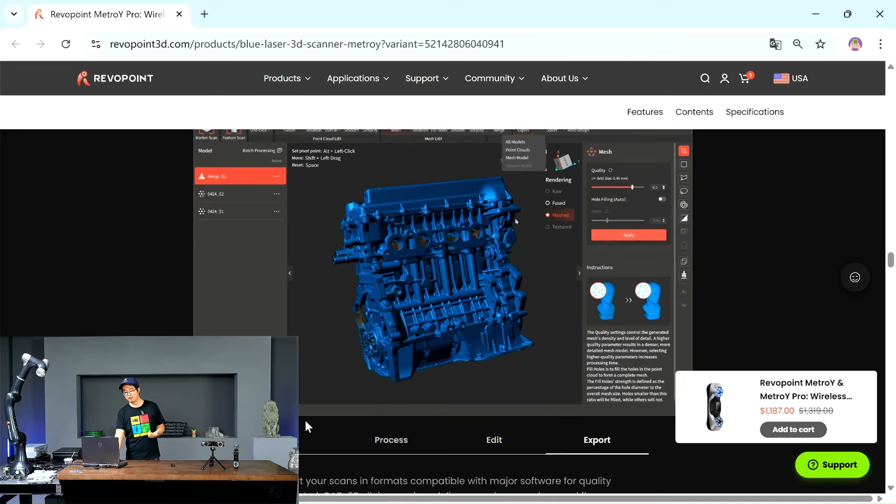Okay, now coming to Revo Metro, this scan software, which we are going to demonstrate a lot. It's just a free software that comes with your scanner that does the scan process, like editing and merging, filling the holes, these functions, and is eventually exported with PLY, OBJ, STL, and many other formats. And it's free. It also has Revo Design and Revo Measure software for your full workflow.

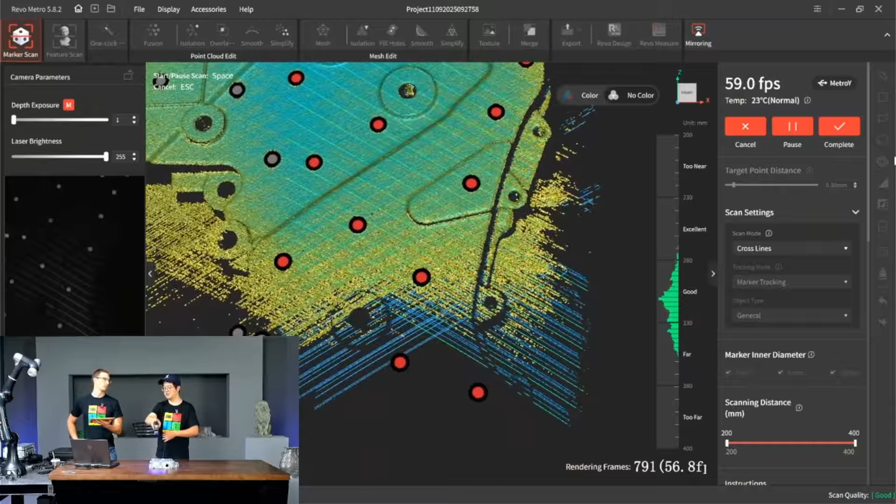As you can see, we actually updated the software. Now you see a new visual effect. It's not green anymore, now it's blue, nice on the eyes. We also increased the rendering technique, so right now what you're seeing is much less noise compared to the previous version.

We're not letting it dynamically show the scanning surface, so the FPS might be increased with a visual effect. I mean, the FPS should be the same, but visually you are seeing a more smooth scanning process.

0.30 millimeter distance, that's standard. Yeah, that's the default. So probably this is what you want when you first get the scanner.

And if you have an Inspire 2 scanner and you download the software, you will be surprised. We're going to make a separate video talking about that.

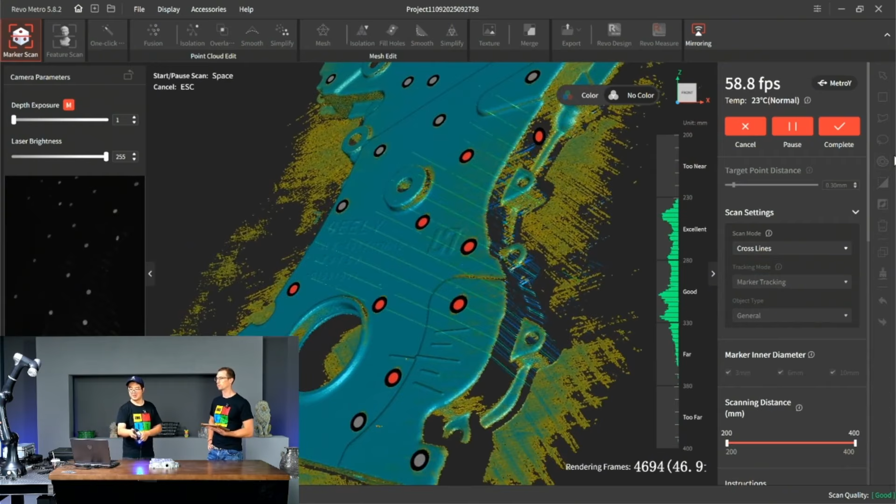If we compare it to the Metro X, I feel like before we definitely would have to kind of angle it around more. So you're now not feeling that as much, are you? Not even 45 degrees, you just tilt it a little bit to scan the side really well. So I think that's another good side of the bigger FOV.

You will feel that FOV especially when we're doing the Metro Y Pro. It has even four more lines.

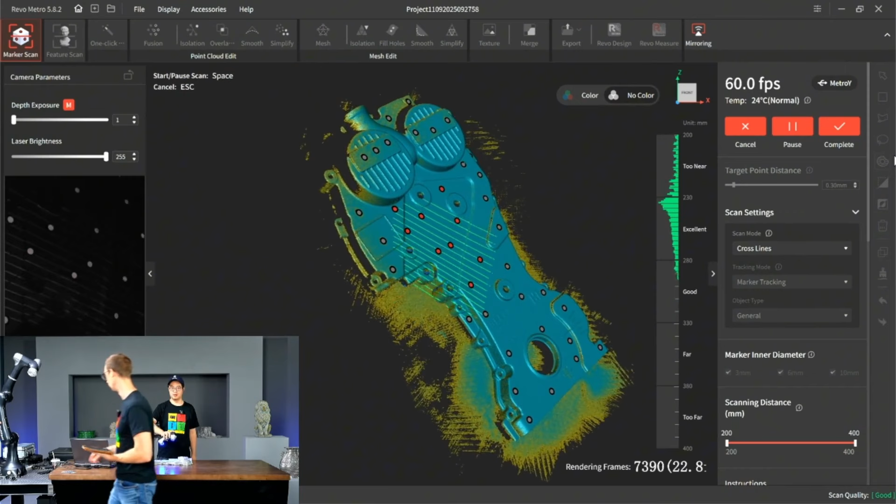You can pause and resume the scan anytime. And if all your markers are on a piece, you can freely move your piece around, even putting it on the turntable. But if for whatever reason you have some domes, some pyramids, marker blocks around, in that situation you would not move it, of course. You can put all of that on a large turntable. But if they're just on the table like this and it moved around, that would be distracting, then that's not good.

The M button, you use it like now. As you can see, we have scanned pretty much of it. Now press M, you can zoom in, and now you will notice what area you're doing right now.

Yeah, it definitely makes it a lot easier to see. And this side.

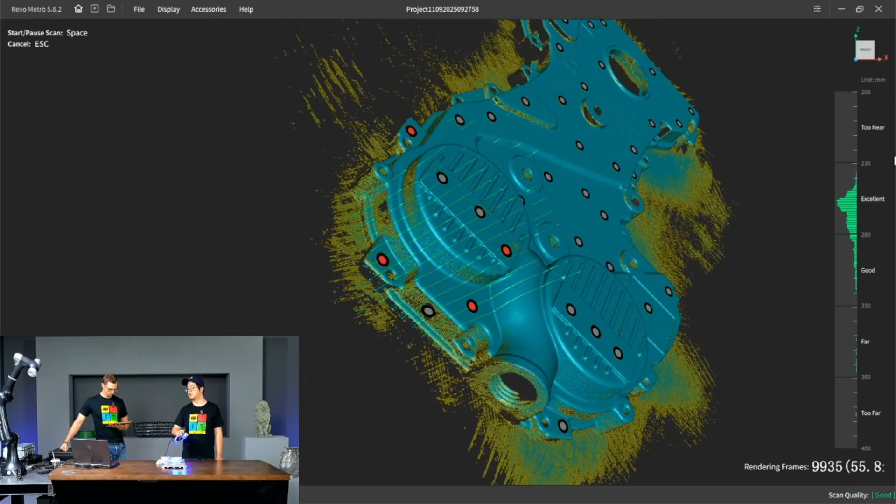The distance meter is not too sensitive. You could scan at a little bit further away distance, and it's not the end of the world if you are too close, you can just adjust in real time. The distance meter bar will tell you by the color. Your job is to maintain all the color in green, and you're good to go.

Okay, the other end, I think we're good to go. Capture this area.

Definitely fast though with extra cross lines. Yep, 30 extra cross lines.

So let's see it. Now with the new rendering technique, as you can see, it's already looking awesome compared to the older version, right? Like right now you can almost see what it should look like after it's meshed. This is the new rendering technique we adopted.

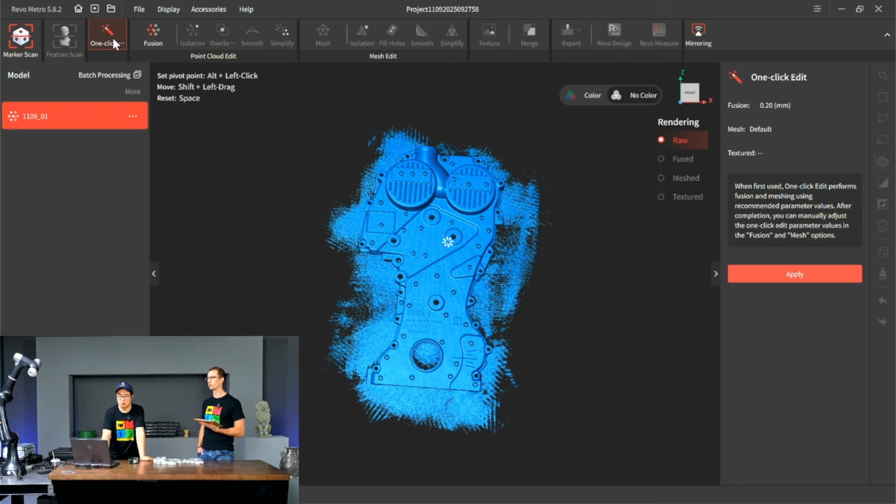Hit complete to finish the scan, and the software will automatically take you to the processing. If you're new to this software, we highly recommend you try this. One-click editing is quite a no-brainer, it will just do everything for you. But here, we're going to do it step-by-step.

Fusion is basically, as you can see, we're under the rendering, we're on the raw stage. All the points are kind of raw. So now what we do is fuse them, make the points more aligned.

It recommends a number for you, this is also interesting, right? It recommends a lower number if it feels you've done a really good scan, so it's pretty happy with how you've scanned it. So this 0.16 point distance means the smaller this number is, you will have a better result.

You'll have better detail, better nook and cranny of the piece you're scanning. If you have a larger point distance, your post-processing will be really fast, but you won't get a really nice detailed 3D model. The detail on it might be washed off. So it's pretty much determined by what you need.

Now we're showing you live, so we want to show you good detail, so we choose a rather smaller number. But when you're using the software and you just want to reverse engineer the frame, then you can just use a rather large point distance number for your project.

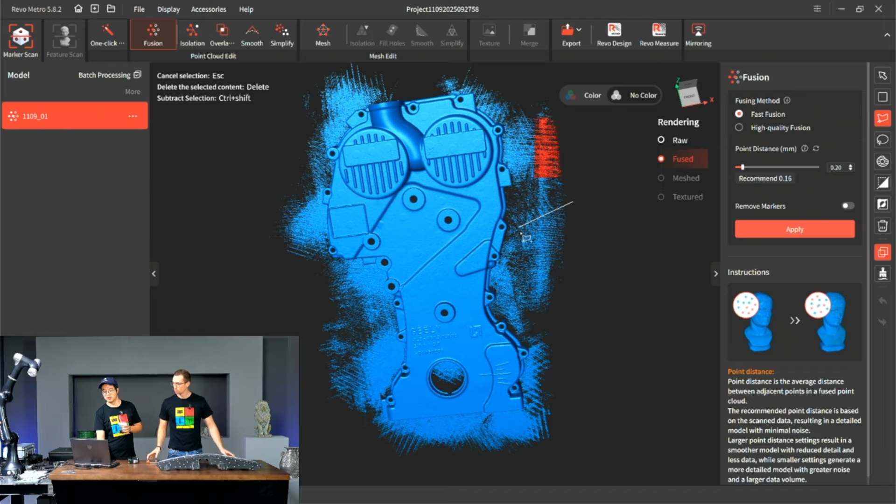So here, this is something more I would like to talk about: these are the selection tools we can do. Like this rectangular, you can select by drawing a polygon, but remember to connect the ending point with the starting point together. It lets you know, right? There's a circle that pops up when you connect it. Sometimes in the early stages I always had a hard time connecting it, but the circle will pop up to tell you.

And also select connection - this is my favorite. Specifically in this case, I just want to get rid of the surface of the table we captured, so we just use this function, slice. Gone, boom, right? And here, isolation is allowing you to check if those are specific noise or unnecessary parts that are not connected to the main object 3D model.

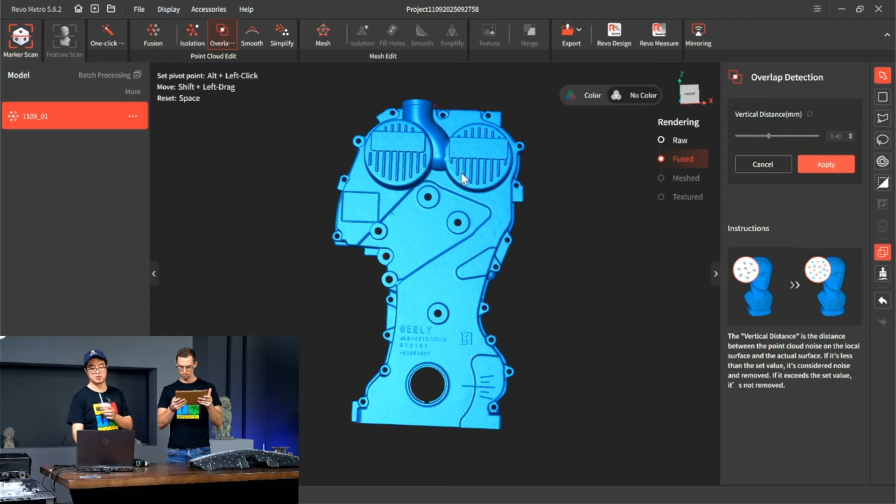And also overlap detection is to let you check, for example, some area you scanned too well while in some other areas your point cloud is too thin. So it'll check the overlap detection and let you delete those overlapping layers.

Smooth and simplify - we won't show you in this live because we want to keep all these good details. If you are good with that, then you can wash away some of the surface, and also simplify will shrink down the size of your 3D model format.

Did you mention you can simplify just by simplifying certain areas, like those markers? No, wash is not those - simplify is called smoothing brush, yes you can, but it's ultimately simplifying that area. So if you feel like you don't want one of these remaining markers, you can use the brush to brush it more flat.

And mesh - we're not going to waste your time showing you a high quality mesh. We'll just run a quick mesh and let you see the final result. It's already looking great under fast fusion and fast mesh.

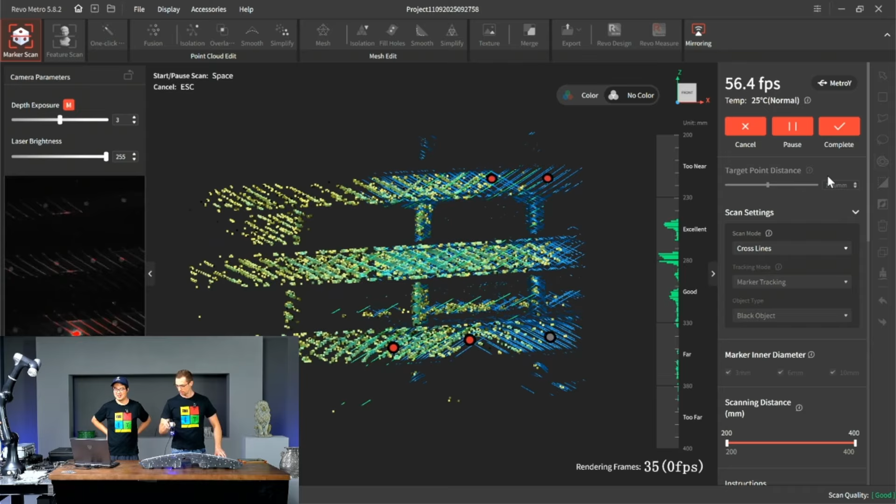Yeah, I think it's not right. It's acting up. Let's reboot the software.

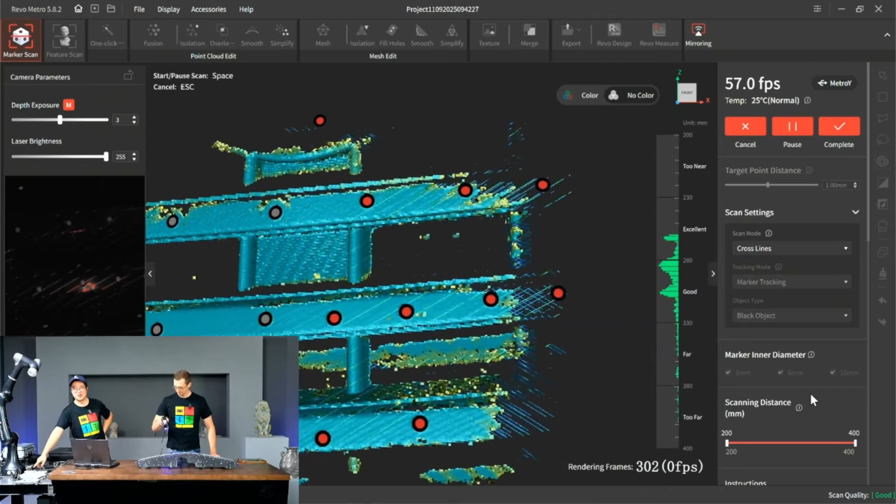Yes, key number one: don't scan a piece that is too dirty, especially if dust is covering your markers. That is definitely not good.

I'm sure you guys immediately notice the difference from switching. Previously the standard was 0.30, and now you're doing 1 millimeter. It just immediately turns blue on the home screen. Yes, you just fly through it, over double the distance, the points.

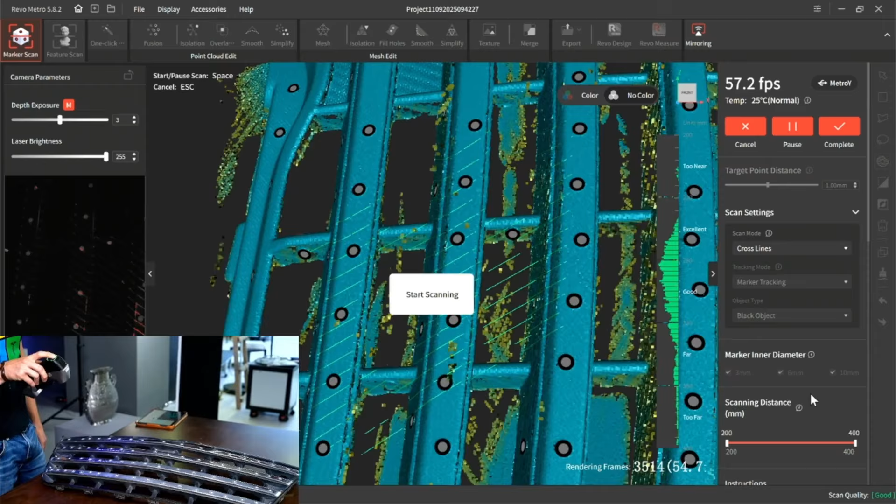Definitely twist it around a little bit again. Pause it, try to get those angles. So great with tracking, as I just twisted it, flipped it around, didn't have any issue with finding its position again.

Man, look at that. Aqua blue. Aqua blue? Are you sure? I mean, seems like an aqua blue. It's just hard for me to distinguish all these colors. Remember, I always call your blue shirt a gray shirt. Hey, what's the term for that? Colorblind? No, I'm not. I don't think I'm colorblind. Because you're seeing colors, but how your brain is reading the colors is a little different than mine.

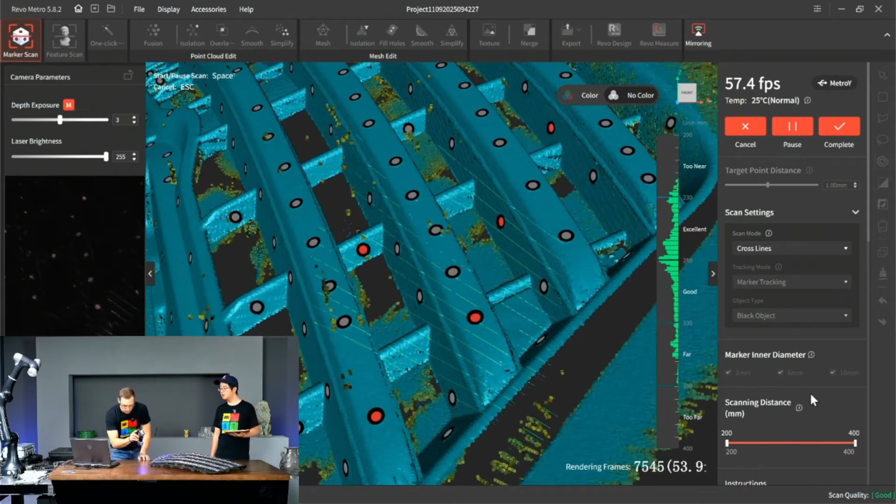Because we are going to be merging this with items like this, the grill on the side has some little knobs that shoot down. Make sure you try to properly capture those types of things if you can. Adjust your angle like this, just the angle, and capture it. Probably use the M button wisely.

Any plans for GPU acceleration with AMD GPUs? Unfortunately, 3D scanners, not only Revopoint 3D scanners but actually all 3D scanners, are based on NVIDIA CUDA cores. So unfortunately, this technology only runs with NVIDIA CUDA core GPUs.

Don't do that. The marker tracking becomes much more stable. Yes, yes, indeed. I'm really happy with that.

Trying to get these front ones a little better for you. Tell the devs to make the M button cycle laser scan modes. Yes, we could definitely utilize this M button more, rather than right now just using it for...

Let me handle it. You just have to be a little more patient.

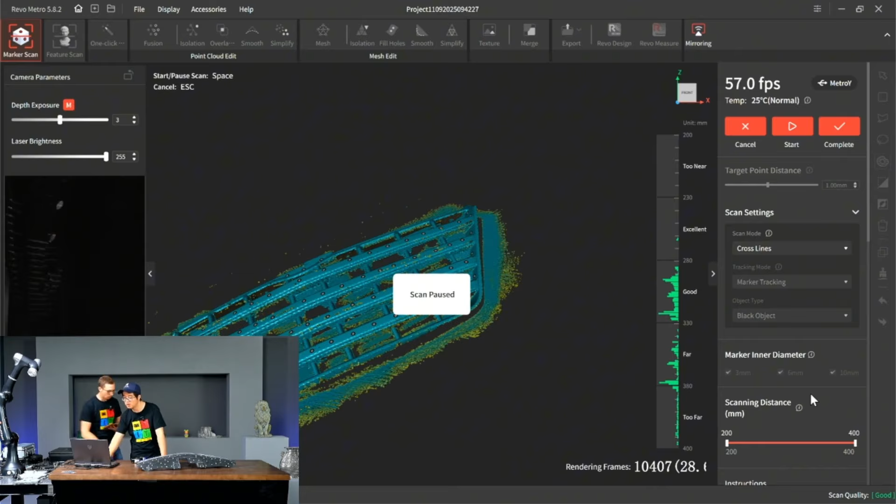Capture those, we could scan. We could capture them from this side. Sure, so don't worry about it for merging, because as long as you have these three. Okay, those three are showing up pretty good.

Yeah, okay. Oh, that one's missing, right? Just this one right here. Okay, so let's scan this side a little more. We should be good to go.

I'm not going to Germany. Are you going to Germany for the trade show, Ash? Nope, you mean Formnext? No, I'm not going there. Are you? I am not.

Okay, now I'm going to show you a feature of the software. Here is scan number 1. So now let's click new scan. Let's not bother to process the first scan yet.

You want something underneath there to keep it stable? Sure. Not really, you're not worried about it wobbling? Because I also want to move it around, so okay, I'm fine.

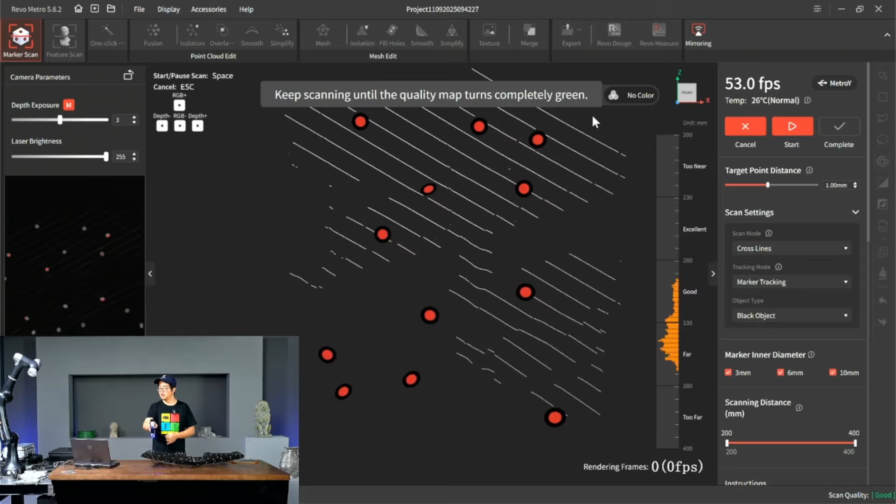Here we go. Oh man, look at that. Really like how it turns blue, it feels just soothing.

Any tips for scanning edges of thin sheet metal? I do, yeah, we've scanned. If you have a Trackit, that's definitely an option. But if you don't have a Trackit, if you have a marker block kit, you can utilize one of these marker bars, and you can lean that thin metal piece on the bar and let it rotate on the turntable. That's how you can capture the thin metal sheet. Especially, you can capture the thickness data of it, which is pretty handy.

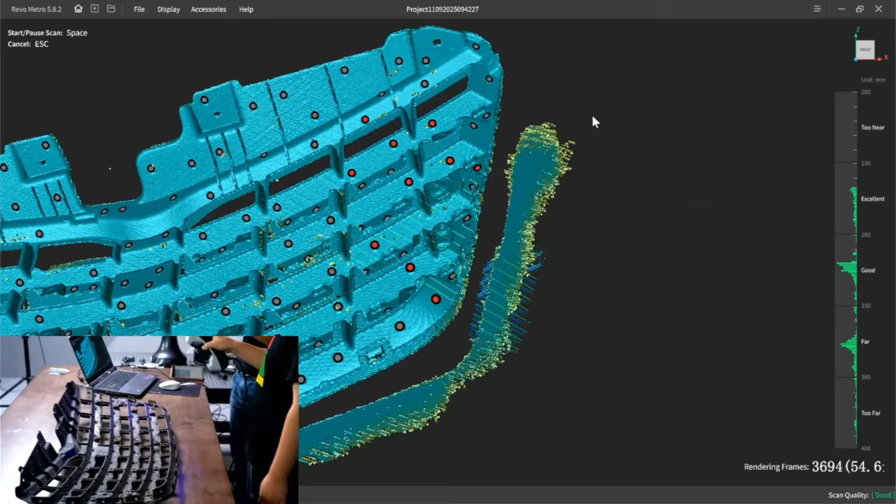So you're just saying as you're rotating over? No, the bar, not the dome. Oh, the bar you're talking about. The bar, I think the bar is on that table. You can grab a bar and show them how we can do this.

You don't really need to pause the scan. You can even do it like me, just rotate it, like that.

But depending on how large that piece of metal is, you probably want to build two or even more if you're scanning a large, long or wide piece. These bars are handy, especially since the new turntable lets you screw them directly into it.

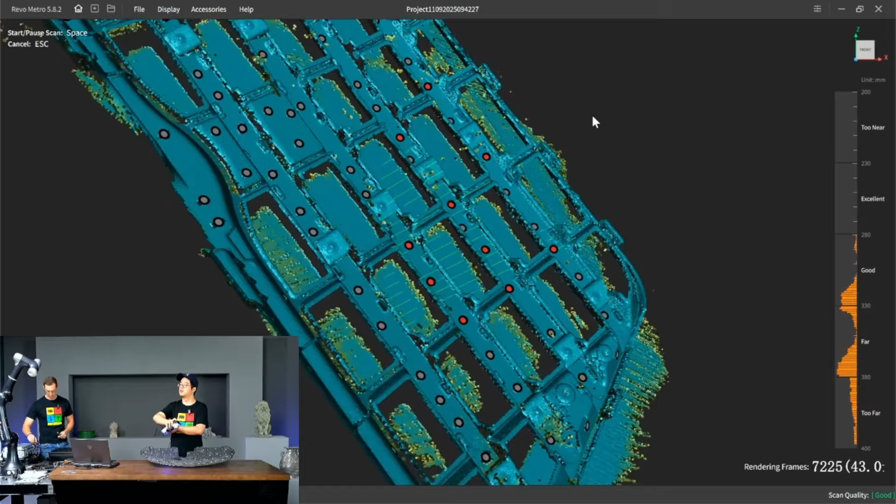We'll show them later on. Actually, you can take a look at Travis's new MetroY Pro video, take a glance of that. He put it on, not a very thin, but a piece of plastic. You're talking about the car tray? Yeah, the car tray. Thank you, yes, that's the name.

We utilized the bars in that video quite well. But for what Fernando's talking about, he might be talking about just a really nice thin sheet.

I feel the markers on the other side are really dirty, but I still can manage to scan all the areas. Okay good, we're good to go, nice scan.

Okay, so now we have scan number 1 and scan number 2. The fun part of merging.

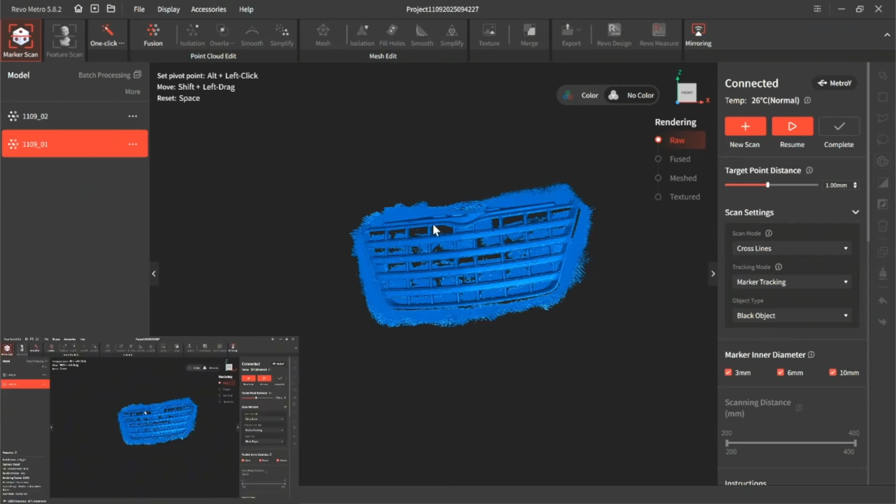This is scan number 1, we fuse it at... well, actually since it's not much of a detail, let's just fuse it at 1 millimeter. But keep in mind both items, front and back, will have to be fused at the same point. It's better to fuse both models at the same point distance for better alignment.

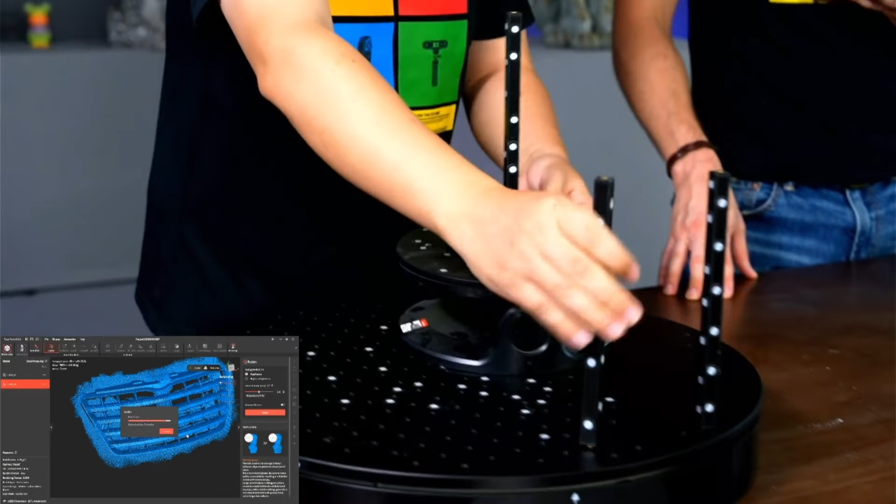This is what Travis was talking about. Now the new large turntable is pretty handy, it can put all these marker bars in these screw holes. Also, if you have one of these dual axis turntables, it has fewer screw holes than this new large turntable, still like 4 of them. You can put them in there. But if you're using the smaller turntable, make sure your piece is not too big or too heavy, or you will need to use the large turntable.

And you can stack these two for long, tall, narrow items.

Okay, let me slice this and... darn. Okay, now here is something I would like to show you a little more.

I could just detach the two parts together, maybe also this part, yes, with the polygon selection tool.

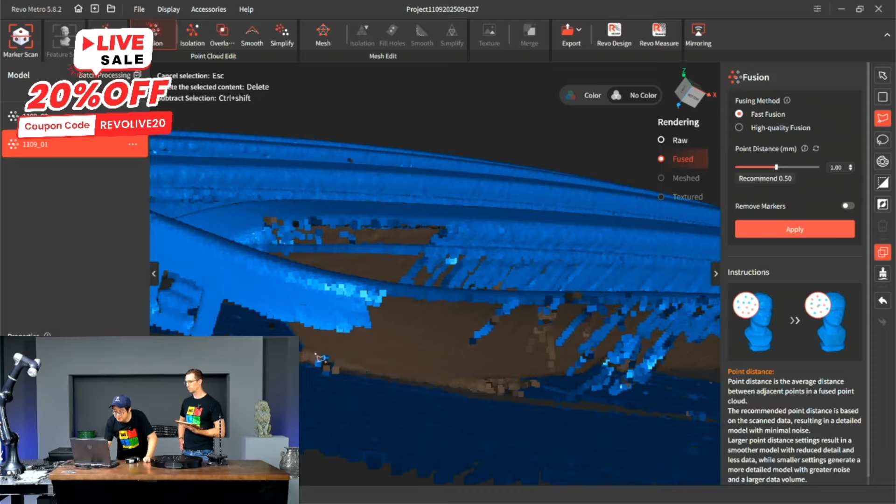Because what would you say is the danger in just doing this straight up slice? Why are you trying to avoid that? You're worried about merging. Because I'm afraid if I cut the wrong part off, that's what I'm mainly worried about, which I've done many a time.

Yes, true. So now we use this select connection tool, use this to see what's still connected. Oh, I guess it's this part.

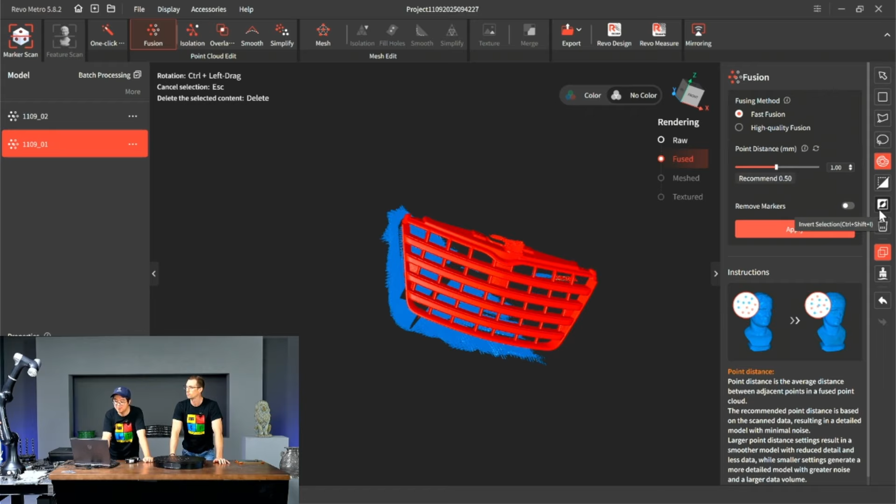Yes, this turntable is much more heavy duty than our previous one. Weight-wise it can handle the same, it just... so now you click and use this select connection tool. It'll automatically filter out any other unnecessary piece that is not connected with your main object, and you can simply invert it and delete, and boom, you have it.

Ah darn, still have this area connected. Okay, no matter, let's cut this part off too.

Skyflow, yes, the scanner does allow you to capture color. We'll demonstrate that later. Full color scan, definitely.

Is that the magic spot, Ash? Is it going to do it? I think... nope. Oh, it is, okay good.

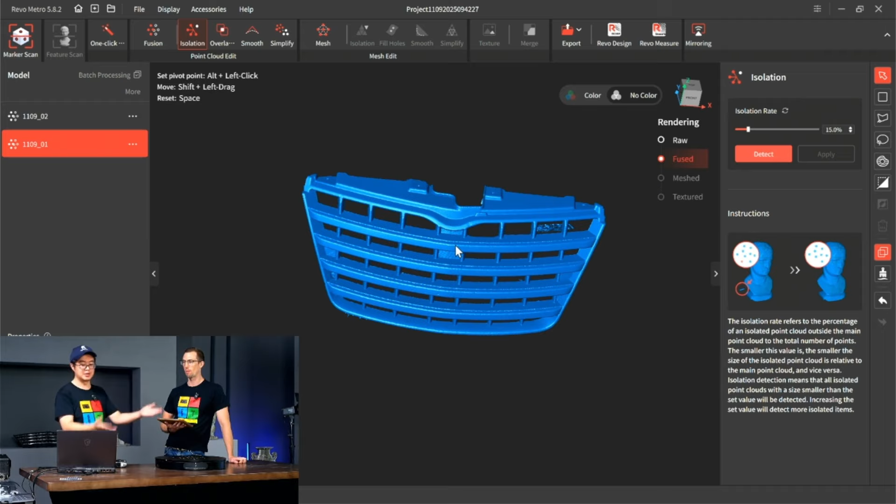So with some more operations, we managed to get this. A better way to keep this clean is you can try to elevate this piece from the disturbing table surface, so you don't have to cut that off like what I'm doing.

Does this scanner allow you to capture color? Actually it does, the Pro version allows you to do full color real time. While the normal version, look at that, it also has an RGB camera, but it doesn't allow you to capture color in a real-time scan. It allows you to do a two-step process: first you finish all the point cloud scan, then use the markers and the RGB camera to do texture mapping on it. But of course the drawback is all the markers will also be on the surface of the object captured as the texture.

So if you want a serious full color scan without the disturbance of the markers, you can get the MetroY Pro. If you don't bother, and just want the texture mapping for reference, you can just get the MetroY, right?

Okay, so that's our... I feel for this side I can just slice it.

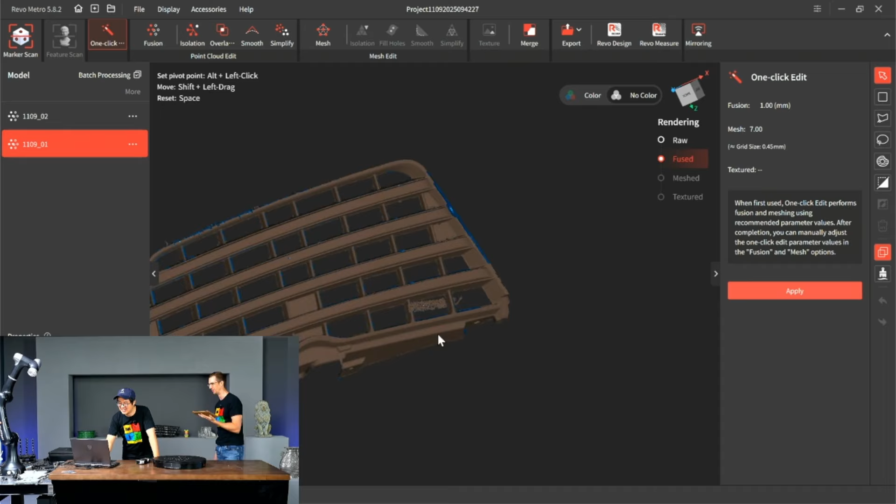Yep, very good. This model is absolutely stunning, Alexandra is saying. You're getting some compliments here, Ash. Thank you, thank you. Well, let's give it all to the MetroY, it's the MetroY accomplishing this.

I am actually seeing something here too. Okay, let's do more cleaning on the first side.

Can this large turntable be controlled directly within scanner processing software? Exactly, it can be controlled. After I clean this up, I'll show you. The large turntable - here, accessories, dual axis turntable, large turntable. They can both be hooked up to a computer via Bluetooth, so you can control it really well with this Revo Metro or Revo Scan software. So the answer is yes.

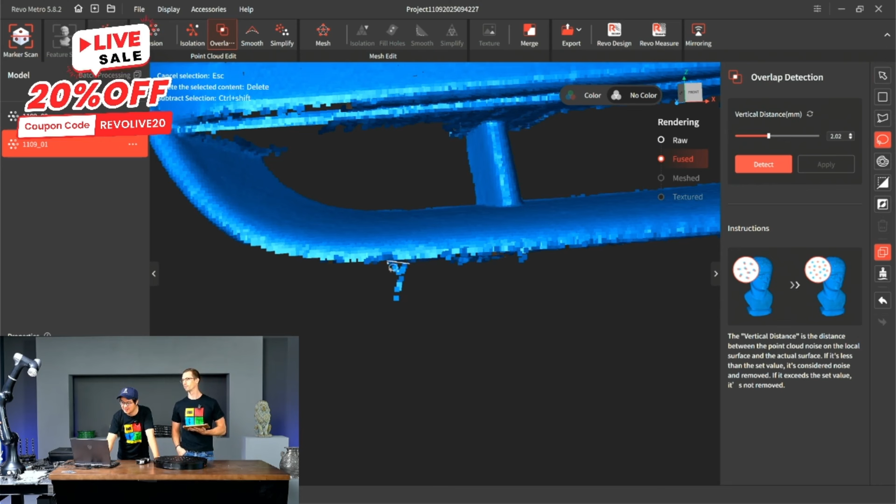Okay, did I check overlap on this side? No, I did not. Okay, so now I have the front completely cleaned up. Let's double check again, yes I do, and also the back. So it's either an option where you can fully scan a piece if you have enough areas on the side, on the edge, to complete the scan at once, or if not, you can choose to use the merge function here.

So it allows you to do a feature or a manual alignment. The feature alignment is most likely used when you scan something and have enough overlap areas, but maybe not in this case.

We could try. Let me hit preview the alignment. It might not be applicable. Look, alignment failed - the overlapping area is less than 10%.

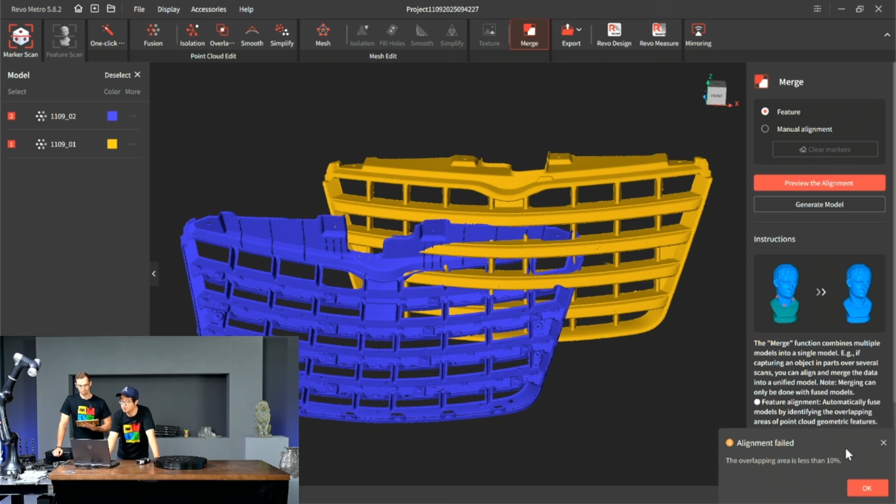So in this case, we use manual alignment here, 1 and 2. It's simple - we just put them in the same orientation like here, and we find the common areas. For example, these buckles, we put 1, 1. You don't have to be 100% accurate, but it's better to be accurate enough.

The software will fix some inaccuracy, like within perhaps 10, 20 pixels, but you can't just go super wrong and assume the software will fix it for you. It doesn't always work like that, okay?

And the issue with that is what? I've done that previously and the layers will be off. The bottom or the top might actually be pressed through one another, looking like it's a hole, but in reality the two layers are separate. So you still want to be pretty precise - it gives you some leeway, but be careful.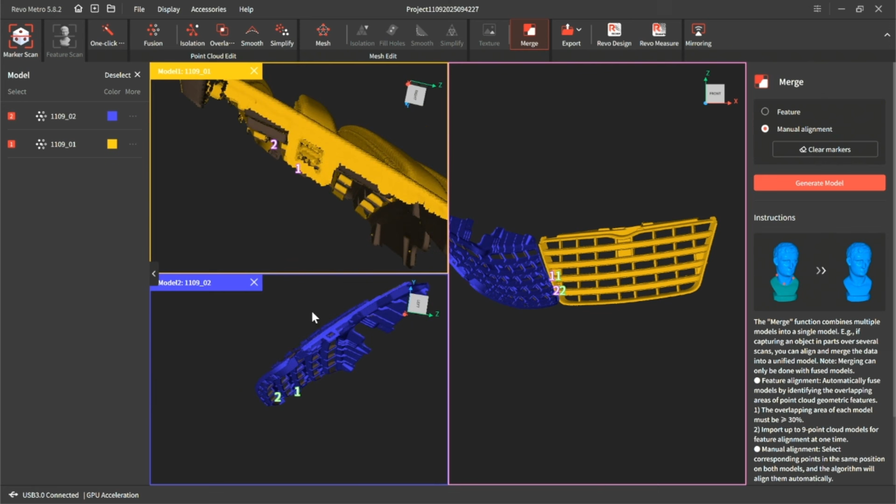So number 3 and maybe another number 3 here. Oh oops, I actually clicked number 3 on the other side. Okay, so number 3 should be here. So at least 3 points and you can successfully merge an object, and if you want it to be more accurate, you can add more points on other areas if you have them.

So now let's generate models. And ladies and gentlemen, we have it - a merged piece of this grill. All right, so slick. That is what you're going to do with the Revo Metro.

How do you play with this software? Okay, now let's... wait, did I just close it? No matter. Now that's enough for the MetroY. Now we want to switch the scanner to the MetroY Pro.

Still, we're going to show you more of the cross line and the parallel and the other laser mode. How about hoping to do about this? Do that guy first? Okay, yeah sure.

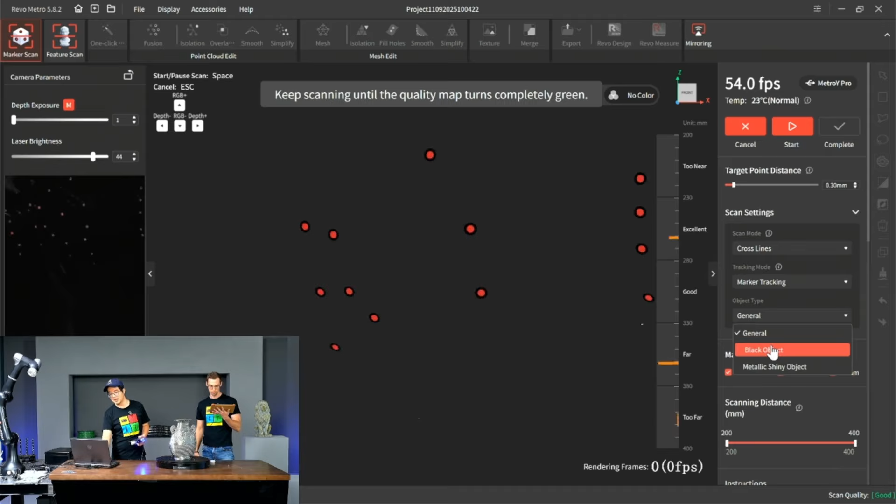Now we showed you the general and the black object scan. Now we show you the metallic shiny object scan.

And we want some detail, so we just keep the default at 0.3 millimeters. Let's turn down the speed a little. And here we go.

You'll definitely see the handiness of the FOV here, right? Because there's huge areas where we weren't able to place markers. Don't worry about these areas—you can put markers on them, though you'll probably need to increase the number of markers in that area, because the scanner needs to see at least 5 markers in each frame. This is the benefit the big FOV will bring to you.

Yeah. Oh, still need more markers, so just stay away from it. Move a little far away from it.

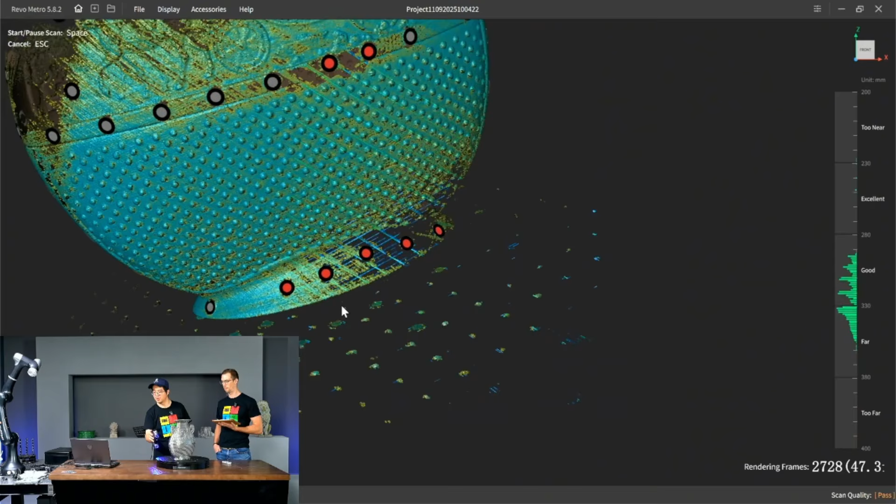Honestly, maybe we didn't do this previously, but maybe this is a good time to put the bars in. Oh yeah, definitely put the bars, because that whole center area doesn't have any markers—that'd be a great time to try that. Especially this awkward angle I want to capture that doesn't have enough markers, right?

Does the Pro and Y use different technologies on power levels? No, as you can see, I am using the same power adapter for them. You probably don't want to mix the Metro X and Metro Y power adapters because one of them is USB-A, and Metro Y and Y Pro now use USB-C, but the power adapter for Y and Y Pro is definitely the same. And especially don't plug this into the Inspire.

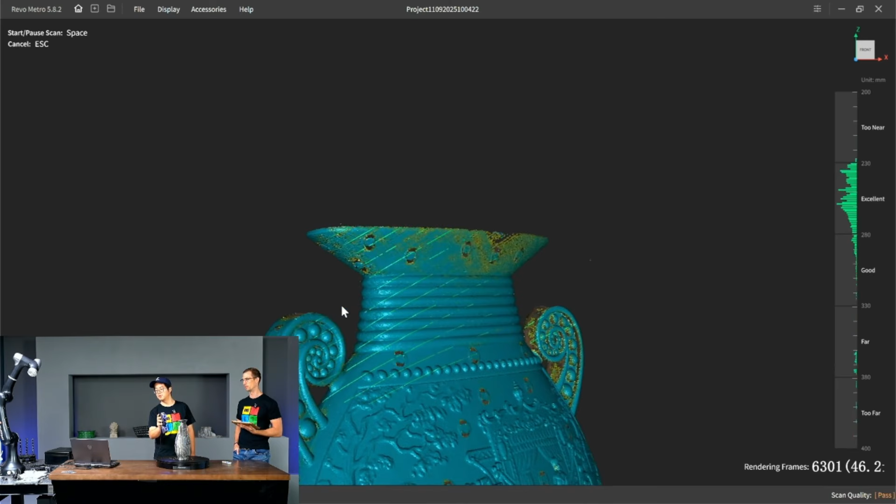We had someone do that. That is not a good idea. Unless you want to see fireworks. I think the adapter of Metro Y and Y Pro is 12 volts, and the Inspire 2 is only 6. So yeah, definitely not a good idea to plug into the Inspire.

Okay, too hard to capture the angle from down below, so I'll just leave that be. Still really impressed—this is not an easy item to scan with just a few markers in certain spots. It's doing a great job.

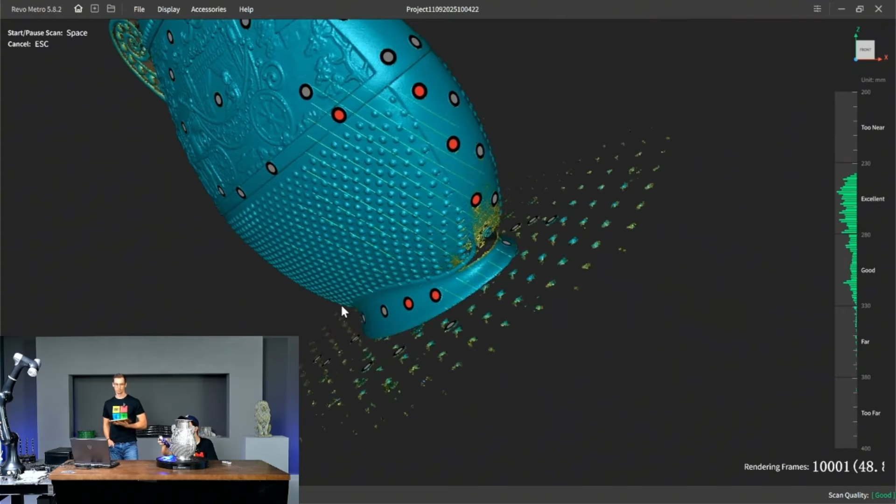Can I at least try harder? Try kneeling down, come on. I think I can do it. As long as there are markers, I should be able to capture it. Yes. All right, succeeded, no problem.

So that's what the big FOV will bring to you. Okay, anyway, I think—

This new software version looks smoother and more stable than before. Yes, because honestly, previously I had difficulty scanning this face with the previous software. Also the denoise level is improved a lot—now you can even see these details clearly from the preview page.

Someone just asked about scanning the top part of the model. We just didn't put any markers on it. Didn't put markers on it. Sorry.

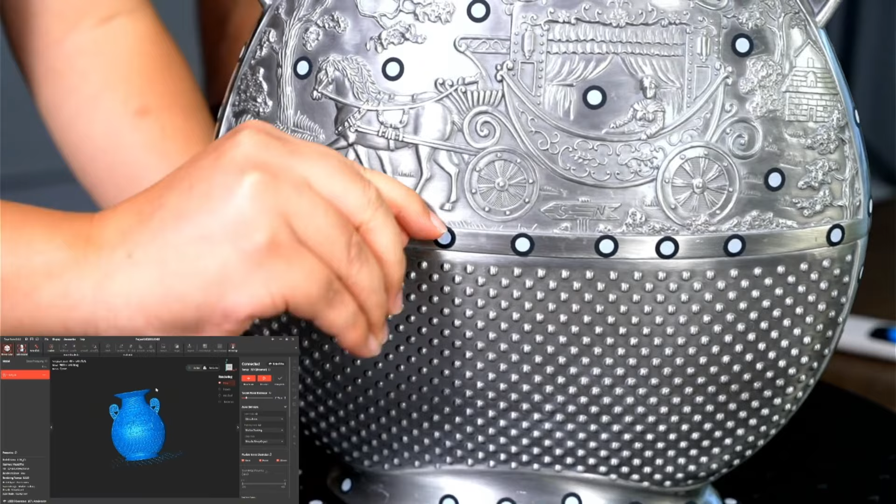Also, here is actually not very good. Look, these areas are actually narrower than the markers I have. So when you're scanning this, do not try to put markers on these narrow areas, because it'll actually deform the marker a bit, which is not good.

To solve that, you could use this—but while I'm doing that, I'm out of the small markers. These are the 3mm markers, so you actually can use the smaller markers for these narrower areas. That'll fix your problem, but this is the only one I have left.

So we're being careful with them. Just need to get us through the next couple weeks. Use them sparingly, but honestly, that would be a perfect spot.

Like this texture here, don't you think? It's still a little too small to put a 3mm. I think no, because it's not laying flat, right? No, it's still not good enough for the small markers here.

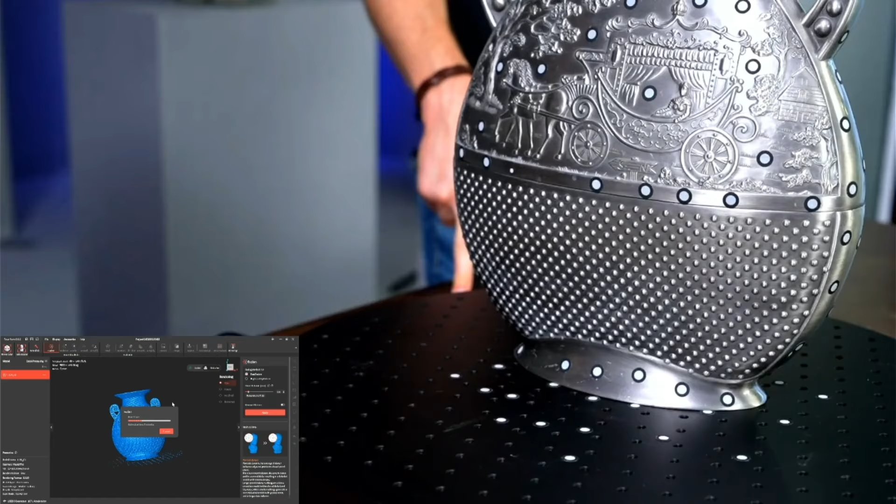Need a 2mm—you need a Metro Y. Yeah. So that's as simple as that. You want a Metro Y to just fly through these areas if you have markers on the other areas.

Well, good scan. Now is it time for the parallel line and the single? Yes. Excellent, excellent.

And we talked about putting a dome in there—that might be handy here. You want a ball or a dome? A dome. How about a ball and a dome? Oh, to elevate it. Yeah. How about this—is it a little deep? A mushroom? Wait. Here we go.

Excellent, beautiful. Yeah, that'll be helpful.

So something we did here—this piece has a little trick with a deep hole. We noticed earlier when scanning this, it kind of had it, because there aren't many areas here to put markers. You might be losing tracking, but you can combine different markers together, the dome and the ball, just to elevate it up. Look at that, that's beautiful. Let me process it.

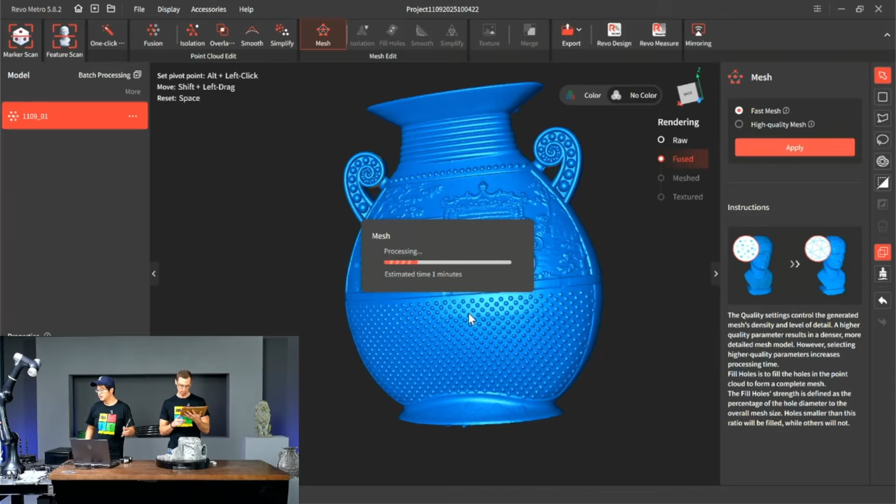This marker block kit you can get with your MetroY or Y Pro combines with the marker bar, I think 4 of them, the pyramid also 4 of them, these half domes which I think has 8 of them, and a lot of marker balls. We put some markers on it for you, but you can always add more if you feel it's not enough when you're getting this marker block kit.

It's much better than your self 3D printed one because we didn't use the normal plastic material to build it. It also has a very good built-in magnetic base underneath. You can actually use the pyramid to support a really heavy piece of metal. It's very durable, hard plastic. And like this, you can even screw it not only in the turntable, you can even screw in some metal pieces that have the same, I think it's called 1/4 inch thread, yeah 1/4 inch.

So yeah, that's definitely what we recommend. Okay, let's see how the MetroY Pro does. Really good, man, look at that, that's awesome. I didn't put markers on the top so it didn't capture that, but man, looks good, looks great.

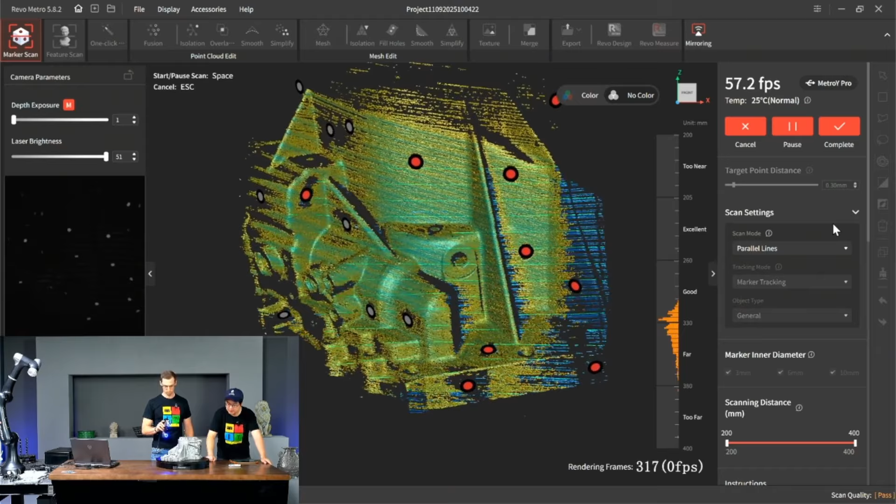All right, you already got parallel lines, we're cool with the standard 0.30 millimeter. Start it up again. You want it faster? No, I'm good with this speed.

We did try the cross lines on this piece the other day, and it worked, but it was really obvious how much the parallel helped out with all the nooks and crannies. You can always combine all 3 together if you feel like it, it's all your choice, cross lines, parallel lines. You could fly through with the cross lines, get your point clouds covered, then try to get more detail with the parallel, and the holes with the single line. That's all your choice.

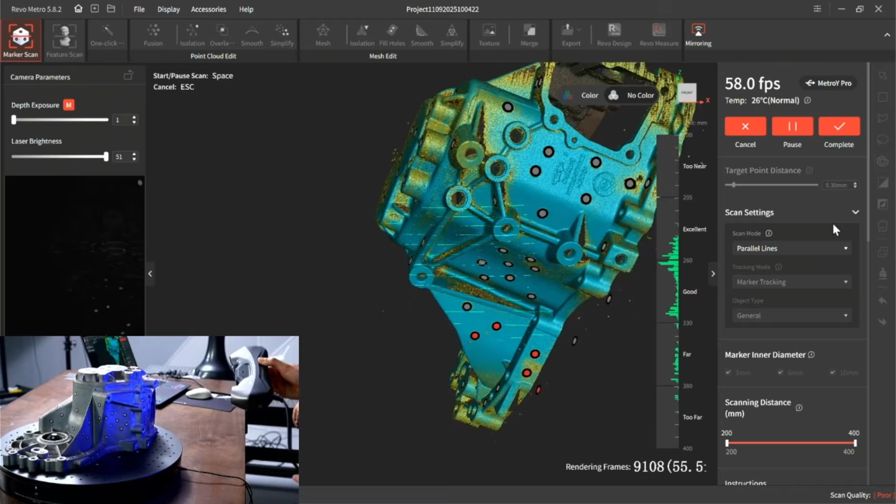You can always pause this too for a little bit, if you're noticing that some areas are just taking a little more time, like this crevice here. Look at that, how easy you're capturing the crevices like that. Oh man, yeah, this piece is in and out all over the place. Yep, it's the hardest type.

Everything we scan, especially this piece of metal, is super hard. And we dare to scan that in the live because that's how much we can trust the MetroY and Y Pro brothers.

Okay, carry on, I gotta take a leak. All right. That is important.

And again, this is the side here where we have the serial number, capturing that real nice, but there's some really nice holes. In a moment, I'll switch over to single line mid-scan and capture that.

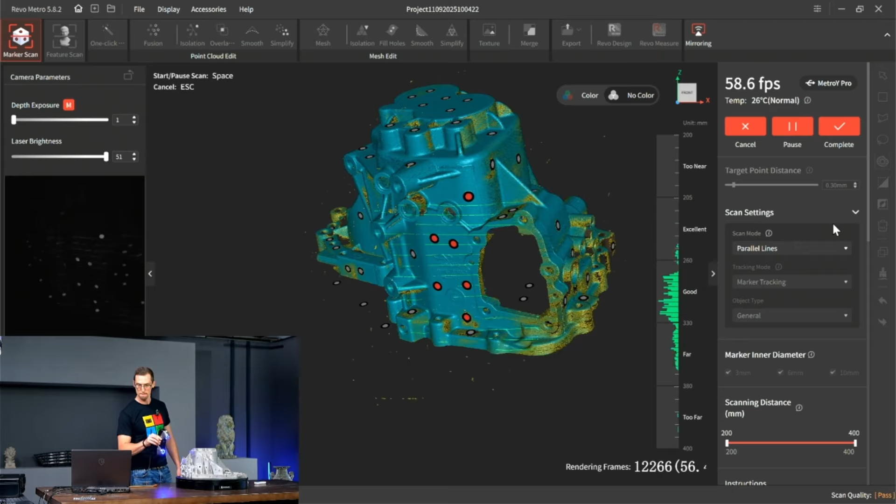I've noticed with the parallel especially, just kind of switch up your motion of wanding it around, go up and down, sideways, throwing a little bit of an angle, don't fully capture everything at once.

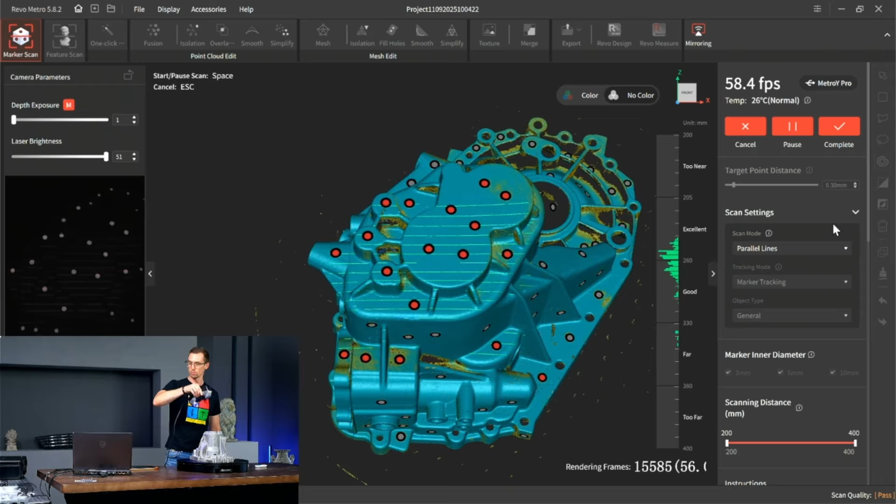So right here, as you can see, this 90-degree edge having the MetroY vertical doesn't seem to be working, but notice what happens if we turn it sideways. Does it capture it any better? It should.

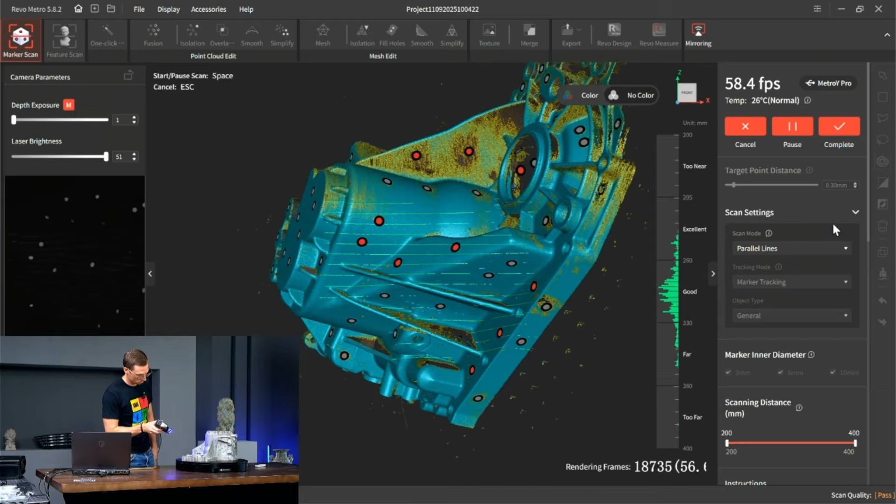Trying to capture that little edge more. Do you want to have a whirl at it? I think you just have to do like this. Just keep it on there. Don't even move it much. Just keep it on that. Also on this side.

Yes, we're using parallel lines right now, everyone. Parallel lines make your scan slower, which is fine because this is designed for you to capture hard to scan areas, crevices, the pockets. It's better to use the parallel lines. It's considerably like twice slower than the cross lines, but it's able to capture areas that the cross lines wouldn't be able to touch.

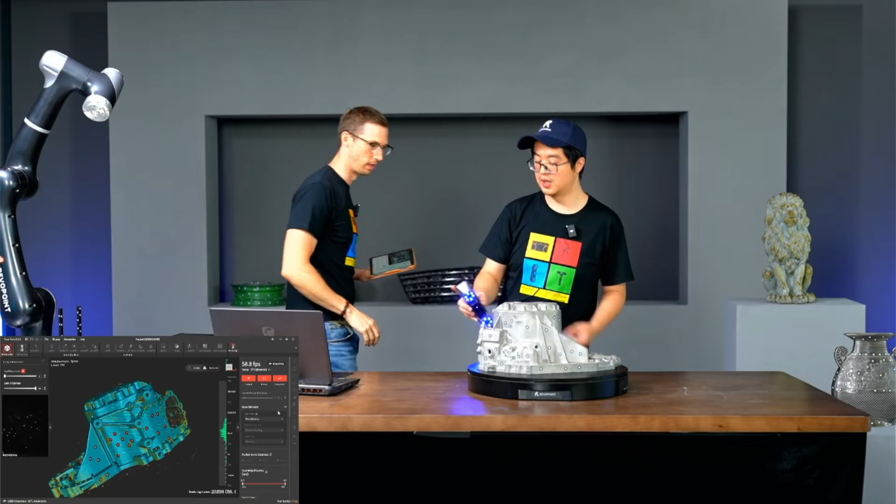I think that's pretty much it. If we scan too much, the audience will fall asleep, too long. All right, let's do the hole then, the deep hole. Here is how you can do the switch, the scan settings.

You need to pause it first. Okay, now in the scan settings, you can switch from parallel lines to cross line and single line hold, even during mid scan, that's what you can do. And then just start up again.

I think you want to zoom in to see more clearly. So guys, how about that? Let's work on these two holes or even this smaller hole. Yeah, just play with the angles.

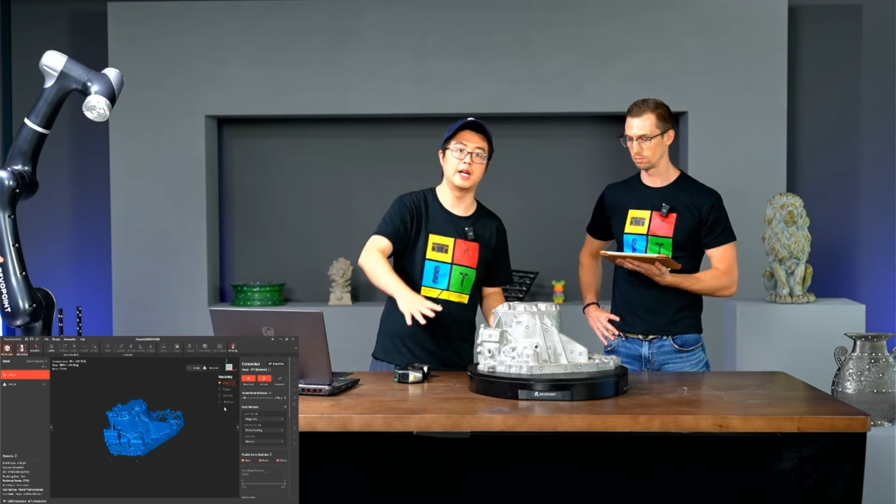You can combine them together in a mid scan. Say, for instance, you want to scan an even bigger object, you can first fly through the easy areas with cross lines, switch to parallel line for those pockets and crevices, and then eventually for the deep holes, switch to single line, so you can combine the three scan modes for your best result.

And if you want to see a more complete result of when we did some deep holes, that was on the transmission case. Yeah, look at that. You almost pretty good, get all the way through these holes. So, guys, we're not wasting your time by processing it.

We're gonna move into the new scan, which I want to tell you something, and also discuss the possibility with you. Is this...

So, with all the demonstration we did today, they are actually not quite good. I don't want to say we did it wrong, but normally if you want to capture something with marker mode, you don't do it with marker tracking. You actually want to do it with global marker tracking, which is a two-step process.

Step one is you first capture all these. You capture with all these markers. And what is the benefit, Ash, of using global marker mode?

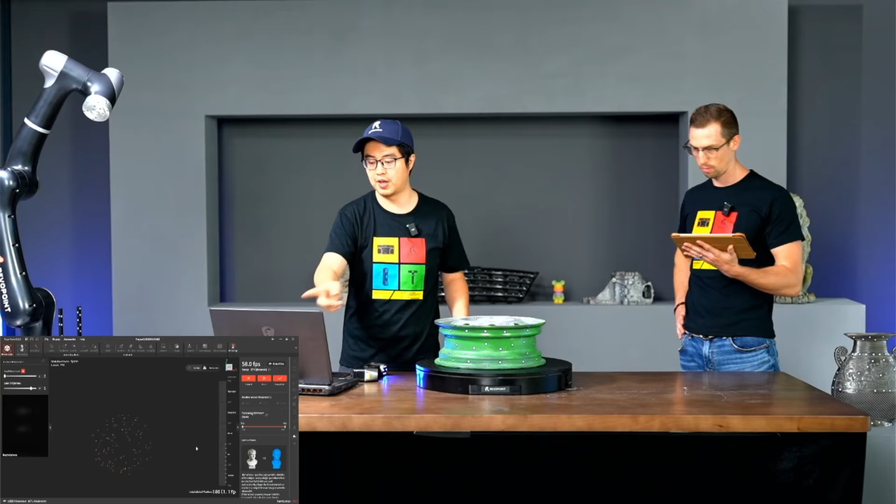So anyway, this is how global marker works. As you can see, I have fully captured most markers on this wheel hub. So now I just hit complete.

And here, the button called Cloud Scan will pop up. Since this is not a very detailed scan, let's use 0.5 millimeter.

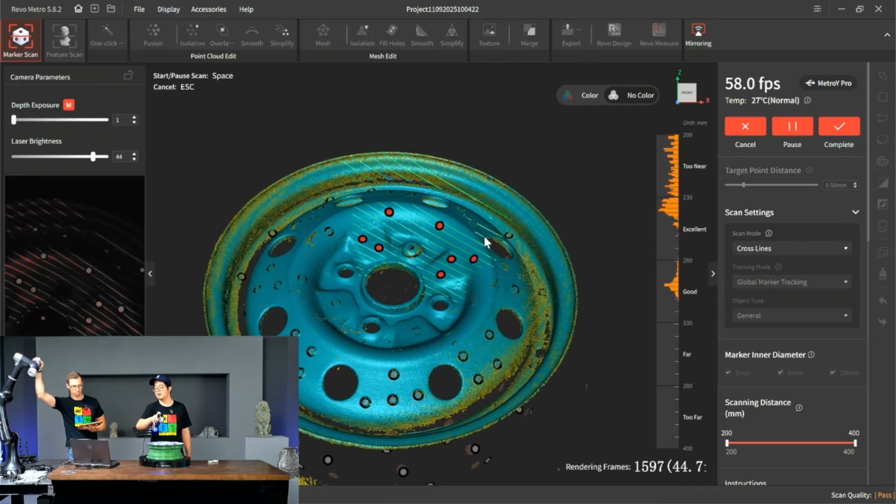So this is the global marker we're talking about. The good thing about global marker is you don't have to think about transition to a new surface. Right now I'm on the outside of the rim of the wheel. After I finish this, I don't need to consider going to the side and flipping it over to scan the inward surface. No, I don't have to. I could use this strategy, no hesitation. You can just pause it and directly go with the inside. You don't even need to worry about tracking, because you already did every tracking in the first run. That's the good side of the global marker mode. Also, global marker mode definitely assures all the accuracy and the tracking.

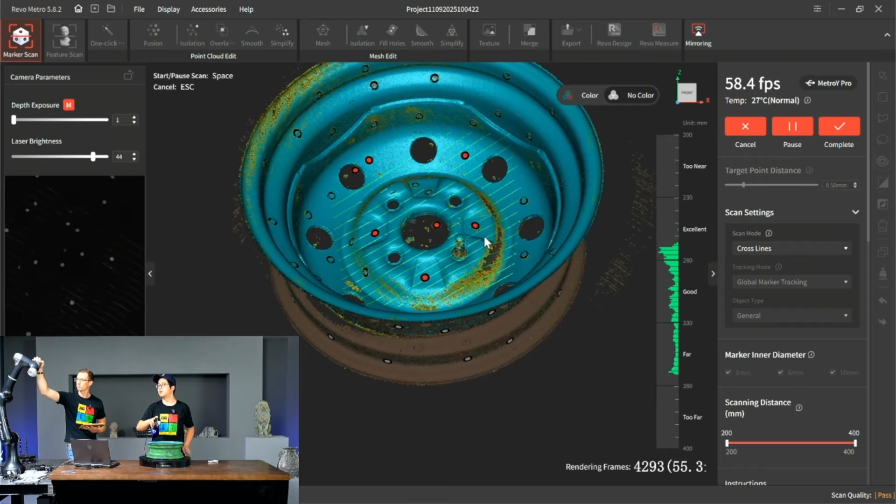Let me know what you think. I'll talk with the R&D guys. Jose is already saying he likes options, so do not remove it. He prefers to have both global marker and tracking marker mode. Sure, I kind of agree with that too. You're already used to the marker mode, just grab your scanner and scan. Now all of a sudden, if we took that option off, it does feel like you're losing something. Yeah, true, I agree.

It's good to know the most accurate thing, of course. For an item like this where you're not rotating it, what's the point of using global marker? You're right, yes, also for very small items.

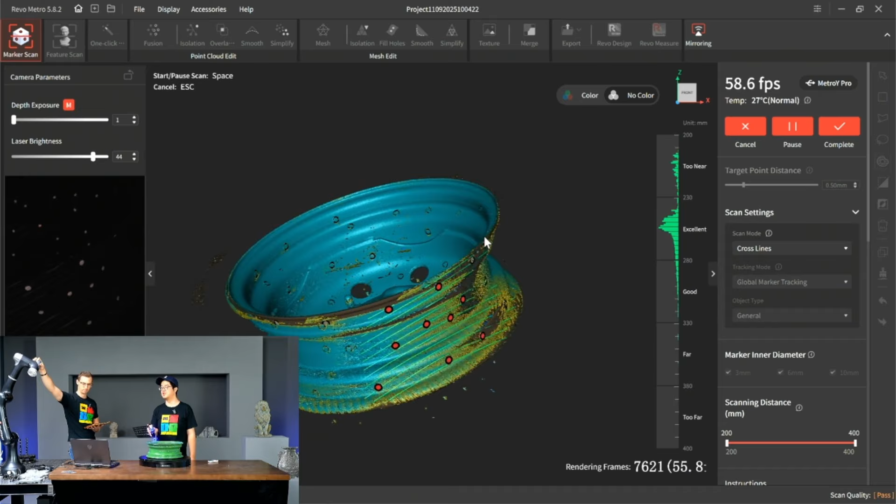So yeah guys, we hear you, and we'll think about that. Let me know more of the options you think are possible. I feel like we could put more hints in the marker mode, or we could reverse the selection list, put global marker first and markers second. They're all options, but options are nice. But I'm just saying, it's important to know that only with global marker mode is this assuring your accuracy.

Jeff, another person, also says he prefers to have options. Have options, sure. Yeah, me too. So the more people that say options, the company can't argue with those results. Yeah, then it would just be taking everyone off if we totally took it away. Another person, ABC, says more options is always nice. We hear you, okay, after this live I'll go ahead and talk to the R&D guys.

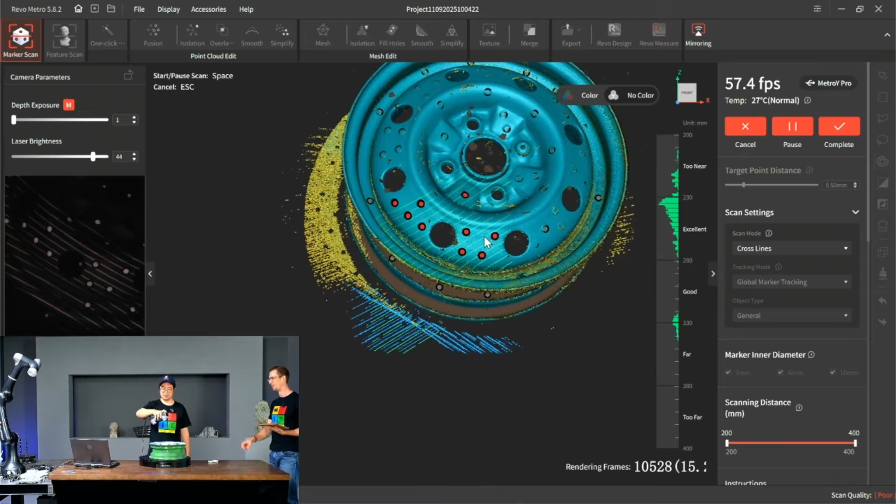So yeah, that's how you do the global marker mode scanning on this wheel hub.

Make it faster, pick up the horsepower? Sure, I think you guys are a little tired of seeing us using the laser mode. Anyway, that's something we're going to move on from here now. So I'm just going to cancel it, not even go at it.

When will we be able to use the buttons on the handheld to change modes on the fly? The buttons, change on the fly, what does that mean? Oh yes, the M button. I'm not sure if it's possible. I'll go talk to the R&D, see if we can make the M button able to be programmed. I think that's what you were talking about, right?

Okay guys, enough today with the laser mode. Now let's change a little and show you another feature of the MetroY Pro.

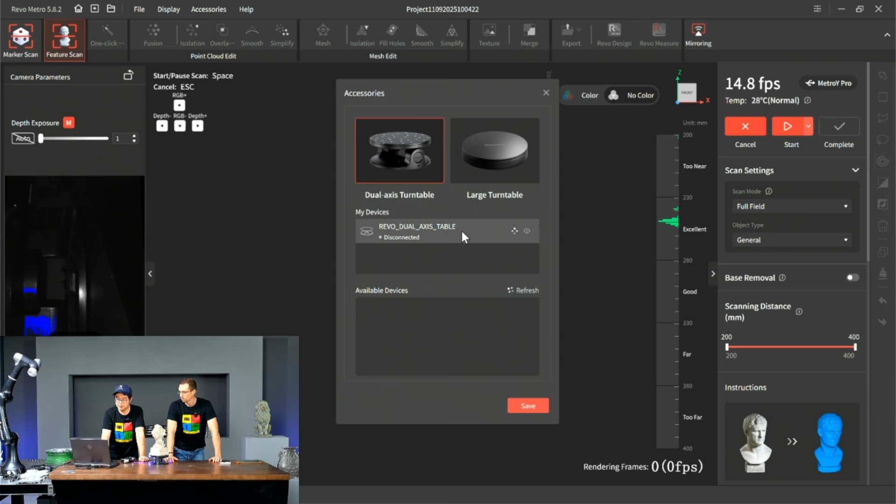Okay, you will get one of these dual axis turntables included in the MetroY Pro case.

Turntable sync - now with this button enabled, you don't have to manually start and pause the turntable during the scan. You can control everything with just one single button. Like right now, the turntable is not rotating. We just click, and it's rotating, and it's also pausing while I'm pausing the scan. So that's really good.

Now I'll let Travis show you how the full field mode goes. It's typically like one of our structured light scanners. Full field - it is already on full field. Yeah, it just went like that for some reason, that was just a glitch.

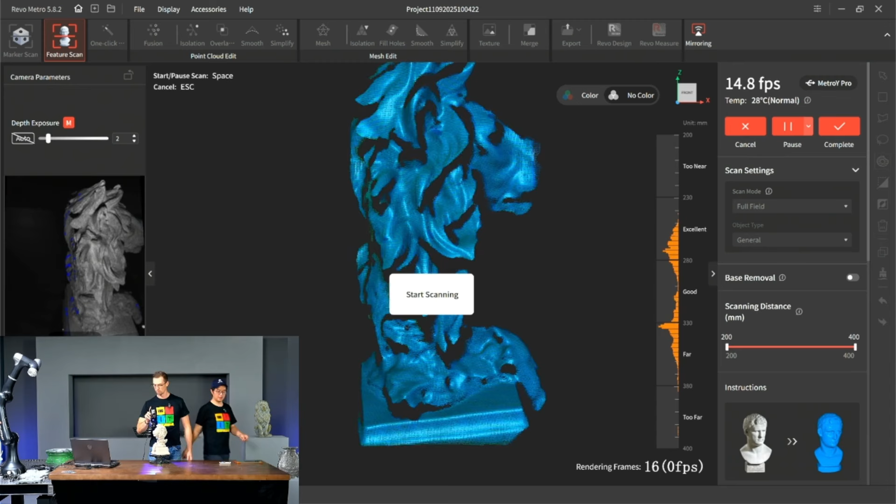If you're familiar with our scanners, we have like Inspire 2, Inspire 1, Pop 3, MIRACO - this is exactly like that. Just a feature-rich object with markerless mode, and full field means it scans really fast. As you can see, it scans like a face, not only with those cross lines. Something like this, you'll probably fly through with less than 1,000 frames. So again, it's a 2-in-1 scanner because it has this full field option.

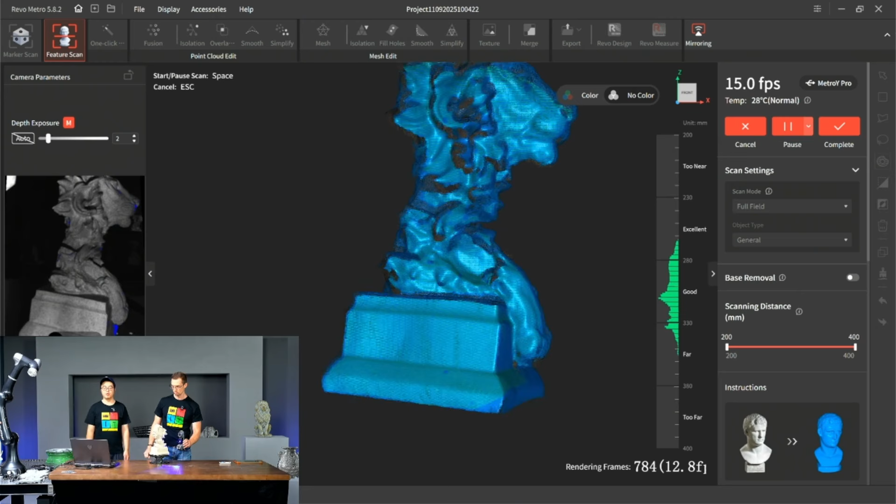So yeah, that's the full field option. And full field doesn't mean it's really bad at details - it's also very good at details if you scan it the right way, just like Travis was doing right now.

But the MetroY Pro, because as you see, this full field light is blue, is kind of too shiny for the eyes. So do not use the MetroY Pro to scan a human body or face. It's class 2, not class... it won't burn your eyes, but it won't be comfortable, so we don't recommend you do that.

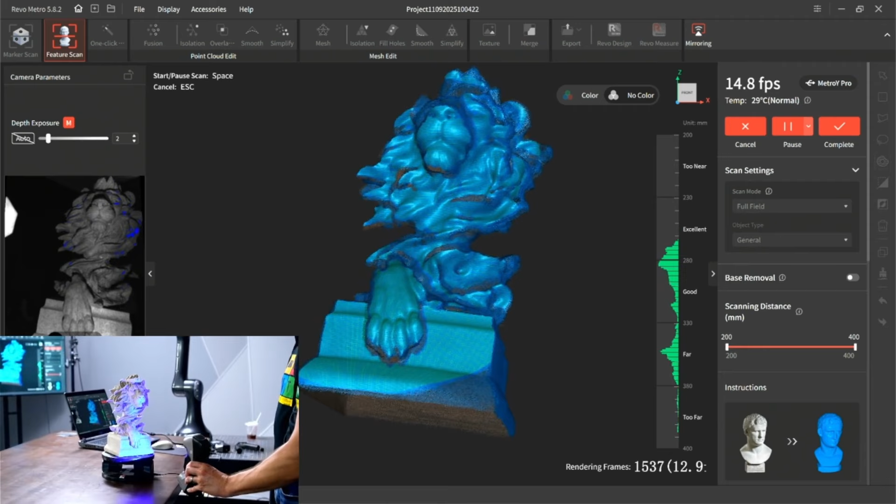Just pass a little bit underneath his chin and that's pretty good then. Let's see. From the raw data, it already looks very good. Same process, just fly through it.

Now you're thinking color.

Oh, you're taking the tripod out - okay good. So as that's processing, we'll get set up for the next one using auto turntable with color mode. We'll want to hook up the tripod to the Pro. Again, it does not come standard - there would be no need for a tripod with the standard, since you won't be using the auto turntable mode anyway.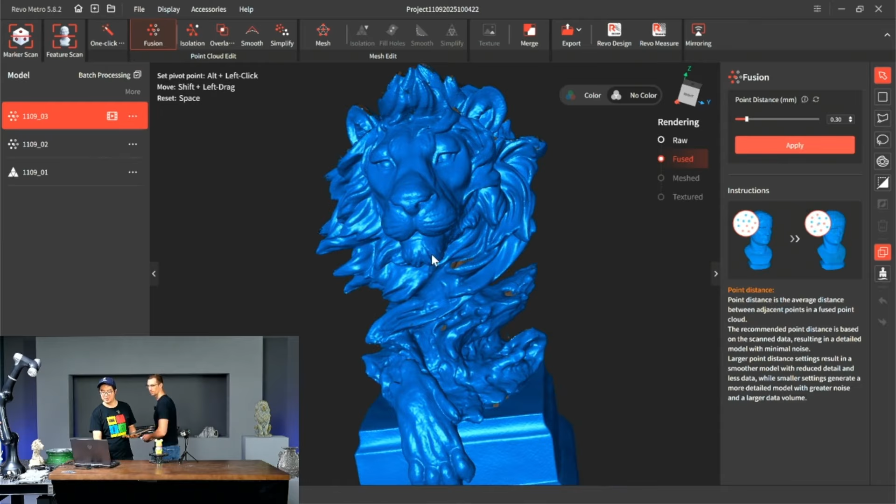Oh, I didn't show you something here - I didn't completely show you this mesh. Here we go.

I didn't show you the fill holes function. This is pretty much the best showcase for something you'd like to 3D print, right? In order to 3D print something, you need to close this model, and this is where you use the fill hole function. As you can see, Travis didn't even bother to go overhead, and the bottom is kind of missing. What we could do, you didn't try, is we could just lay it down and the tracking will continue - just remember to pause and resume the scanning.

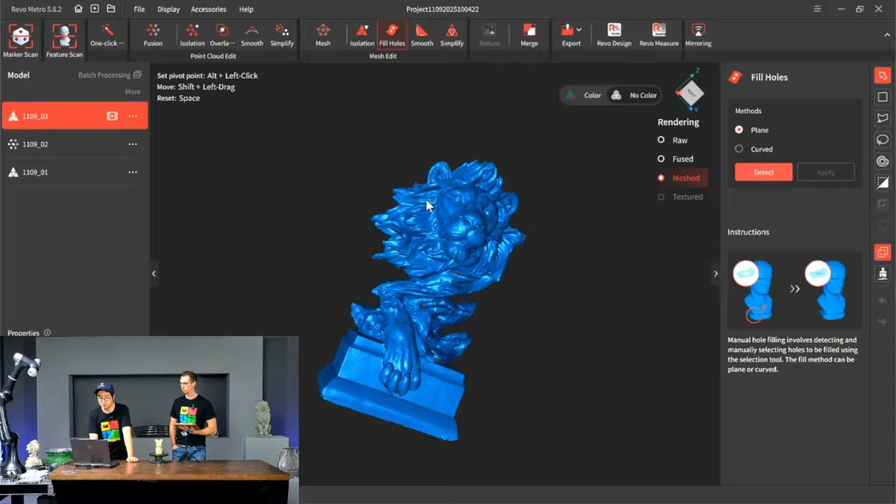So now, curved - let's first detect these holes. Selecting curved because this is obviously full of curves, there's nothing about it that's plane. The bottom would be a good time to select. You could manually click each hole to fill, or use a selection tool to fill all these holes, or just press Control and A to select them all.

However, I don't want the bottom to be filled with a curved hole, so I just deselect it and hit Apply.

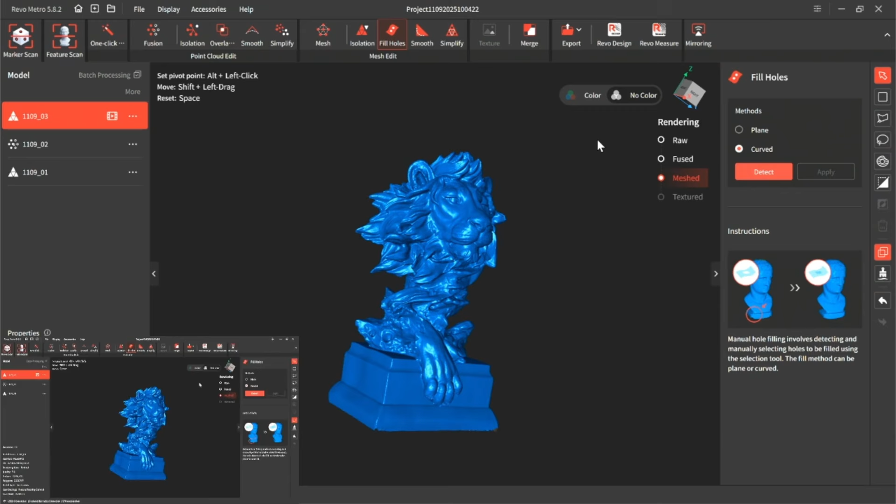The software will fill the holes for you, but that doesn't mean all these, after fill holes, will look the same. So it's always good to fully scan an object and only use the fill hole function for those tiny little holes that you missed or can't reach. Because by all means, the fill holes feature isn't the same as the real surface. But as you can see, we barely can see it now - the software is still very intelligent, it knows what these surfaces should look like, so it does fill hole pretty well.

So now, let's just choose plane and fill the bottom area.

And let's click the bottom area and hit Apply. And you will have a 3D model good enough, ready to 3D print.

Wait, why did my computer freeze? Oh, it's not. Okay, good.

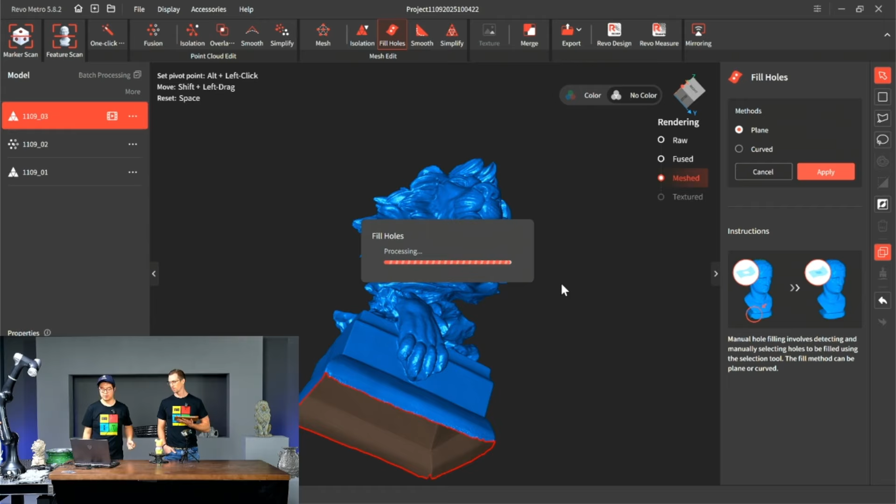Sometimes the color is a little backwards to me. I feel like it should be green meaning selected, but it turns red when selected. Kind of always throws me off. I feel the color is reversed. Right, you're right, green means selected, red means it's not. Like green, go, red, stop. Yes, you're right.

So that's a model ready to be printed. It's also very good, very detailed, great detail. Well, since we're already in the software, I'll just go over it all. So we'll talk about every feature here. We didn't talk about the texture yet, which we're going to with this little bear.

So now, export. As we mentioned earlier, you can export your point cloud with PLY, OBJ, or ASC format. Or you can export your meshed model with all 6 formats, which is compatible with most of the mainstream 3D software.

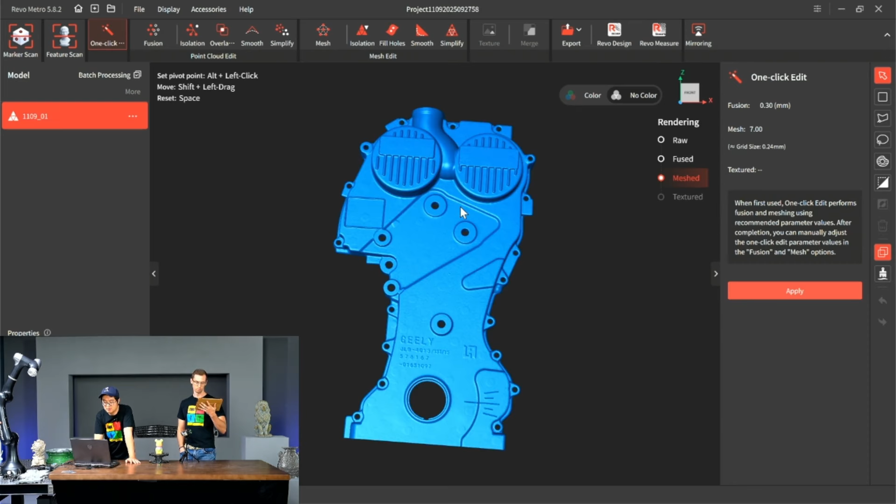Talking about the software, let's talk a little more here. Let me open up... hold on, I think this is the first scan, are we? Yep, it is. So in this live, it's nothing about the machine anymore. It's a new software that we recently developed. It's called Revo Measure.

From the name, you know it's a measuring software that we provide. We even have a shortcut in Revo Metro or Revo Scan 5 software to let you directly jump to the measuring software with the exact 3D model you just scanned, so you don't have to open Revo Measure again and manually input the model.

Well, I guess the software... let me reopen it again. The resolution seems to have a problem because I hooked my computer up. So let's just manually open up Revo Measure again. Yeah, this looks more like it. Okay, so now I just manually import a scan, or I can try to do this again. So I see the problem: if I open it from Revo Metro, the resolution goes wrong.

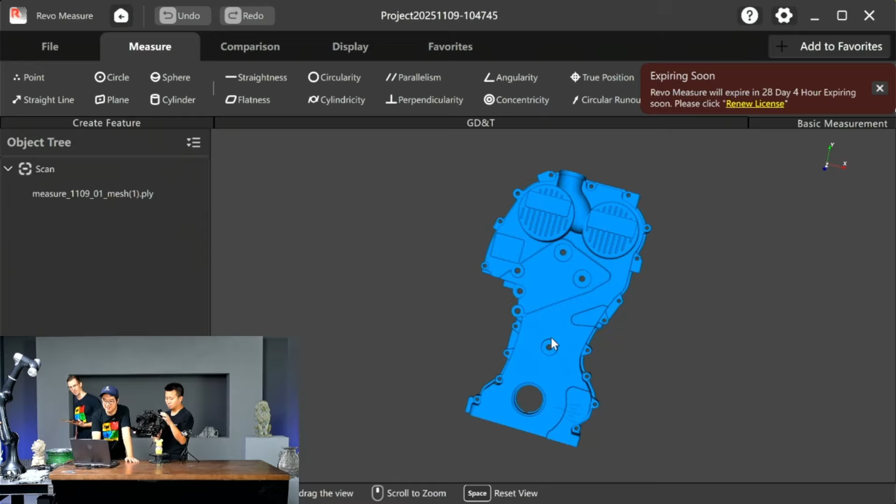And as you can see, I really like this. Click and hold to rotate, shift and click to drag, scroll to zoom, space to reset. So now here, if you click, the tutorial will pop up on the bottom. This is what I really like about how this software is designed. So you can choose 2 different points.

Create point A, create point B, and look, control plus this to select multiple objects. Click 2 objects and choose to measure its distance. That's how easy it is to use this software. It's really handy.

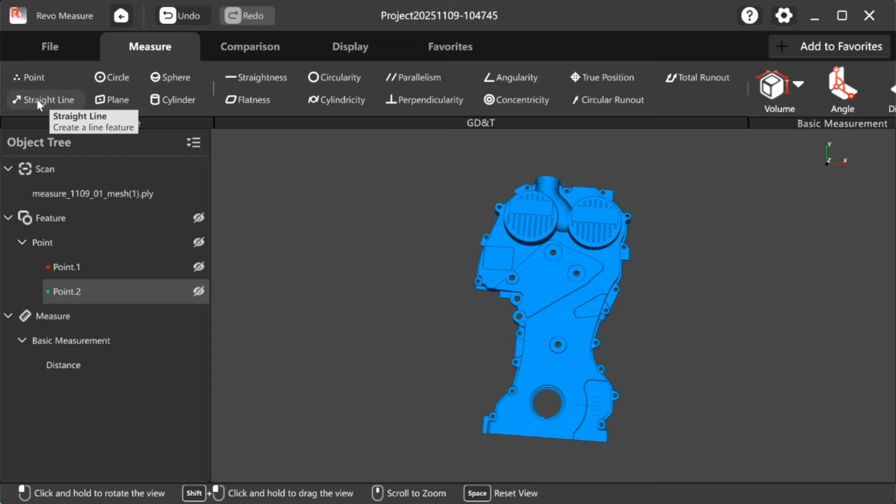Okay, now let me just... expiring soon, let's not bother with that. Okay, so here, the circle, the sphere, plane, cylinder, straight line, everything. You can also do the comparison, but because I don't have the STP or CAD file, I can't do the reference.

But what you could do is import the CAD file and the mesh data. You can let the software automatically align it for you, or you can choose to manually align them together. Then you can calculate the deviation, calculate the point deviation, and do an overall deviation mapping with color scanning.

And Ash, do you remember how much Revo Measure costs? I think we'll price the Revo Measure at $399 per year, based on subscription. It's really cheap, right? And I think the 3-year license is even cheaper at $999, and a lifetime license is $1999. That's the price for Revo Measure.

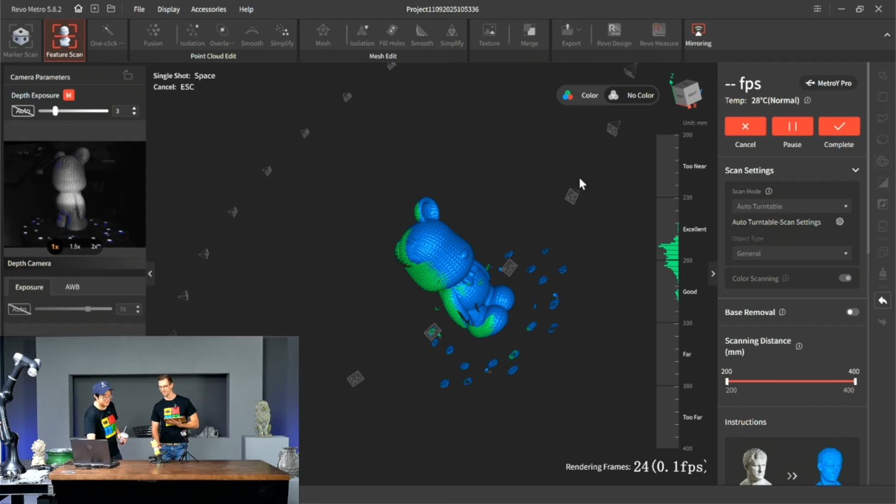There it goes, it rotates. Here we go, that's the second rotation. And we have our sticky pad on there — do not forget that. That is an essential part of having an auto turntable, or else your piece is going to fall off. Remember to stick it on the turntable, or a glue tack will work too.

Polished off your coffee? Yeah, not very good today. I don't know why, maybe I ordered from the wrong guy.

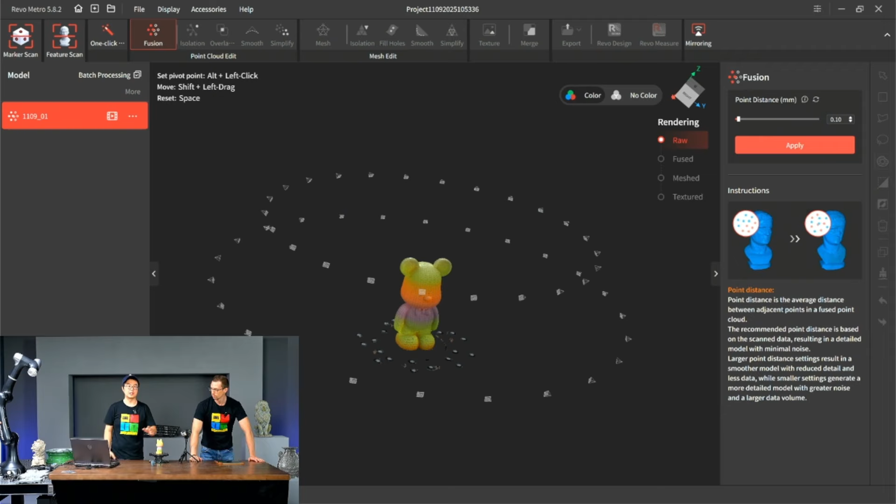It's going to take a long time doing the processing because we're going to fuse it at 0.05, which is going to take a while. In this case, let's just do 0.20, or let's try 0.10. Another good side of this auto turntable mode is it's based on single shot, so your scan will only have a few frames — like right now we only have 48 frames for us to do the post-processing. Just think about if you do it in continuous scan, it'll be like 2 full rotations, so probably about 800 frames.

So that's also going to save a lot of processing power on your computer if you use this auto turntable mode. We could do a 0.10 millimeter point distance to show you — actually this printed one is also very detailed, look at all these bumpy areas on here. We'll let you see. And Jeff is wondering about the 20% — does it apply to other scanners? Unfortunately no, you can only get it with the MetroY or MetroY Pro, or another SKU with the Revo Design and the Quick Surface Pro bundle — you can also apply it with that.

Okay, so the fused result, great — pretty much it, look at that. Look at all these bumps, right? Rotation, here we go. Let's run an isolation check, let's run an overlap check.

And color, no color — you can always choose doing processing as well. So now let's do a high quality mesh with a grid size of 7. About 4 minutes — think about if you want great detail with a continuous scan, how much computing power you would need for your computer. Since I do not have a very good computer, we're using a laptop, so you'll probably have a much faster experience on your desktop. But still, auto turntable mode is going to save you a lot of time in processing it, even with a very small fusion point distance and a very high quality mesh.